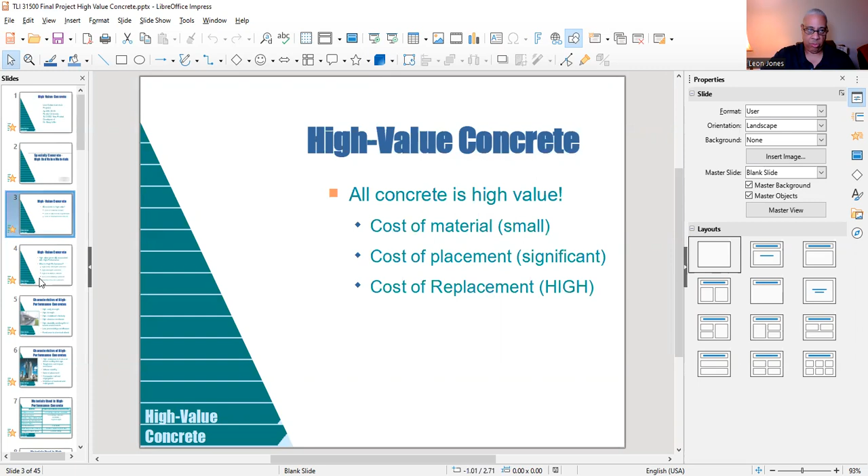That's for any project, so I wanted to develop a product that is cost effective but strong. Now, high value concrete is generally associated with high performance. What is high performance? Well, you have high early strength concrete, high strength concrete, high durability concrete,

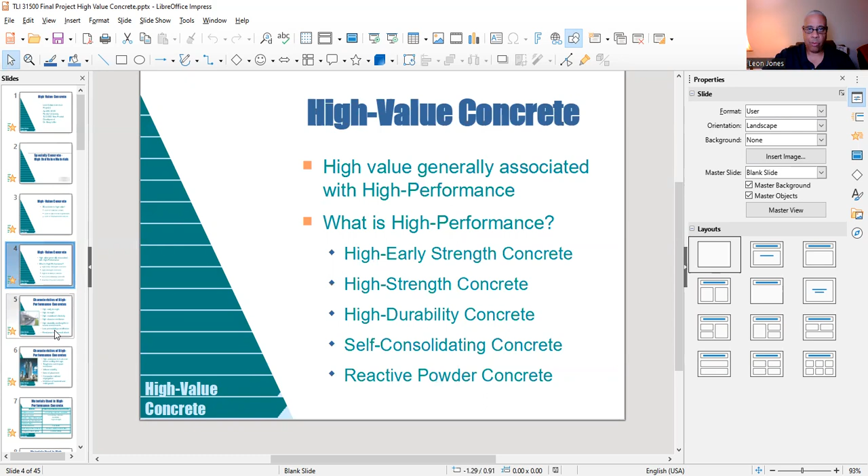self-consolidating concrete, reactive powder concrete - it's all brand new forms of high value concrete. Now, the characteristics of high performance concrete: again, we're looking for the high early strength, the high strength, the high modulus of elasticity, high abrasion resistance, the high durability and long life in severe environments.

As you know, concrete makes a good base. It can last a good 50 years. Now we're also looking for low permeability and diffusion, and of course, resistance to chemical attack.

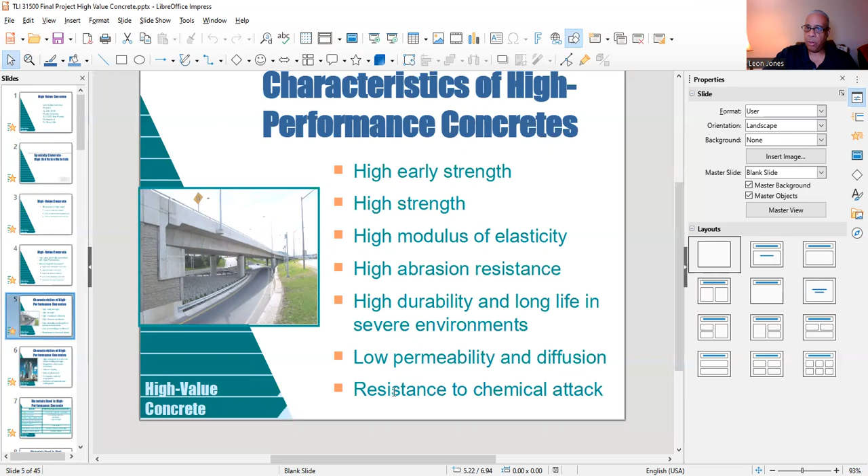Also, we're looking for high resistance to frost and deicer scaling damage, toughness and impact resistance, volume stability. Of course, you want the ease of placement, the compaction without segregation. When something segregates, you mix it up - you don't want segregation. And also the inhibition of bacteria and mold growth.

Now we're going to get into a little chart right here, talking about the materials used in high performance concrete. First of all, the material, Portland cement. We have blended cement, fly ash.

We also have calcined clay and metakaolin, calcined shale, superplasticizers, high range water reducers, hydration control admixture. And for our primary contribution and desired property, we're going to use the cementing material for durability,

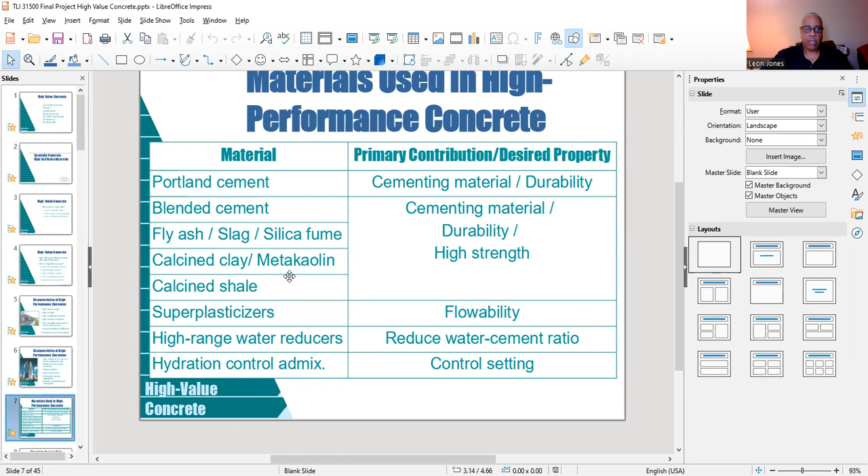high strength. What we're going to do is have some flowability - it means how it comes off the chute. Now all this is going to be tested in the lab, so we will get the testing results to see if we have to go back and make any changes in the design. We're going to reduce the water cement ratio, and we're going to have a control setting.

Again, the materials used in high value concrete are accelerators, and you need accelerator in the wintertime, especially when you're pouring concrete, because you want to set it quickly. And remember, concrete cracks in the wintertime and expands in the summertime, so you want to have control joints in your concrete.

You have your retarders, your corrosion inhibitors, water reducers, shrinkage reducers, ASR inhibitors. You also have optimally graded aggregate. Aggregate is stone - that's what the AGGR period stands for. It's aggregate. Polymer, they put on bridges.

And then what are we looking for? Control setting - we want to also accelerate setting, that's what accelerators are. When we deal with corrosion inhibitors, we want to control steel corrosion, because when you place concrete, you have what we call reinforcement bars, known as rebar, that add a little tension and strength to the concrete. And you want to reduce cement and water content and shrinkage, and control the alkali silica activity, always wanting to improve workability and, of course, durability.

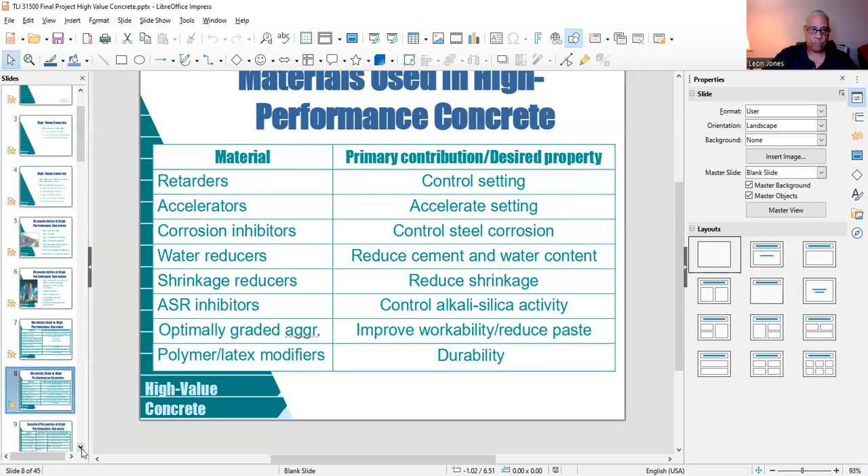Now, some facts that you have to understand. When I deal with any type of product, what kind of numbers do we need? Well, for high strength, we have what we call ASTM, that's the test method. ASTM stands for American Society for Testing and Materials.

Here's the criteria: 70 to 140 megapascals. When we deal with pascals, we're dealing with pressure, 28 to 91 days. That's for high strength. Now, high early strength, this is our spec right here.

ASTM C39, 20 to 30 megapascals, 3 to 12 hours or 1 to 3 days. That's the criteria.

Then we deal with high early flexural strength under a different specification, ASTM C78, 2 to 4 megapascals, 3 to 12 hours or 1 to 3 days.

Abrasion resistance, another specification, 0 to 1 millimeters depth of wear. This is what you use to test all of your specimens. You can't do anything without a spec.

Chloride penetration, that's AASHTO. AASHTO is the American Association of State Highway and Transportation Officials. They deal with your state roads. That's a spec, less than

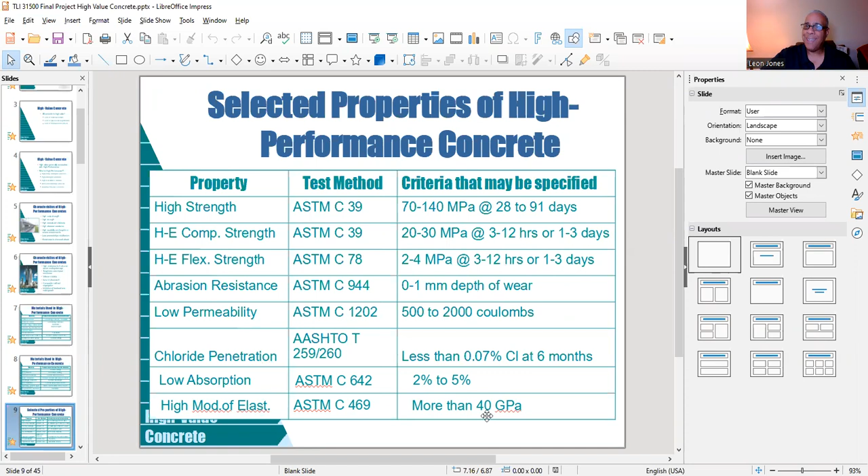Okay, again, when we deal with high early strength concrete, and this is all under high value concrete,

we also have, again, ASTM C39, AASHTO T22, 20 to 28 megapascals, which is when we convert it over, because when we deal with pascals, that's metric.

What we're dealing with is pounds per square inch here in America. Basically, when we lay concrete down for any type of infrastructure, we want 3,000 to 4,000 PSI, 3 to 12 hours or 1 to 3 days.

And again, for your high early flexural strength, when you have specifications as well, you're going to have two: ASTM and AASHTO. We're looking at 300 to 600 PSI at 3 to 12 hours or 1 to 3 days.

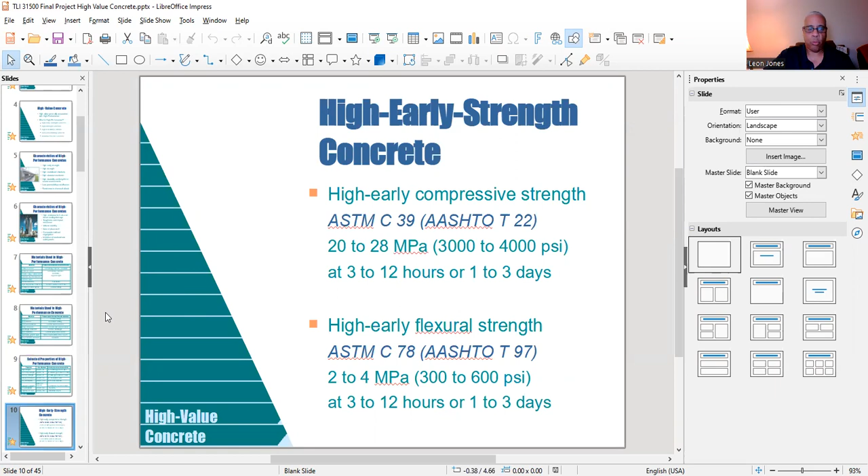Also, more data for you: high early strength concrete may be achieved by type 3 or high early strength cement.

When we deal with the content, we're dealing with, if you're in metric, 400 to 600 kilograms per cubic meter.

When you're dealing with English units, like we utilize here in the United States, 675 to 1,000 pounds per cubic yard.

Low water to cementing, and that's our materials ratio by mass, 0.20 to 0.45 mass, and a higher freshly mixed concrete

temperature and a higher curing temperature. This is what you want to do to achieve the workability of your concrete.

And again, this is basically a brand new product. So there's a lot of risk you take, but if you get it right and sell this product,

it can give your company a good reputation, and companies can generally make good profit and gain customers.

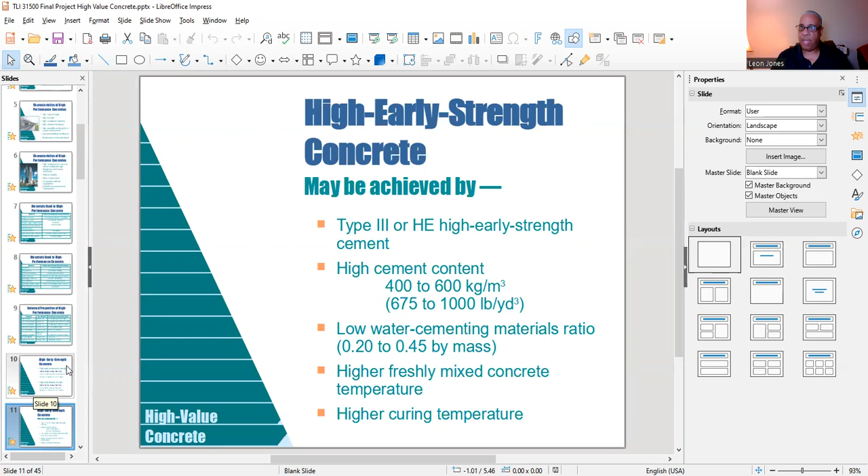In the second half of this video, I want to give you the business aspects of this product, how we can sell it.

Alright, high early strength concrete can be achieved by chemical admixtures, silica fumes, steam or autoclave curing, insulation to retain heat of hydration, and special rapid hardening cements.

Now, what I'm giving you right now is, just think of it as we're in a lab and we're developing this product, and we're running different tests on this product just to see what our data is going to come to be.

And more data for you: we're in our high strength category, and most of us, when we get to the comparison, most structures use ready mixed concrete.

And generally on that kind of concrete, you're going to go from 3,000 to 6,000 PSI.

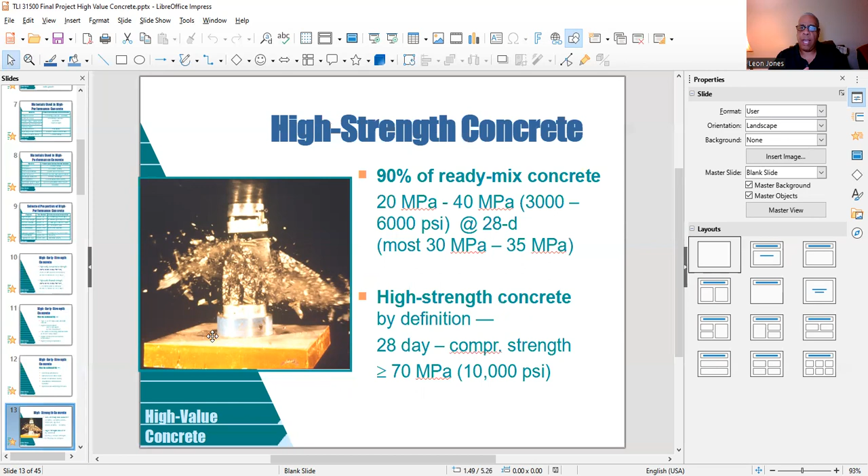And when we deal with high strength concrete, by definition, that's 10,000 PSI. That is really high, that's 3 times higher than the 3,000 to 4,000 PSI that we want.

We're going to get into the aggregates. This is what is put inside your concrete. We want 3/8 to 1/2 inch nominal maximum size, because that will give you the optimum strength. And what we want to do is combine single sizes for required grading, which allows for closer control and reduced variability in concrete.

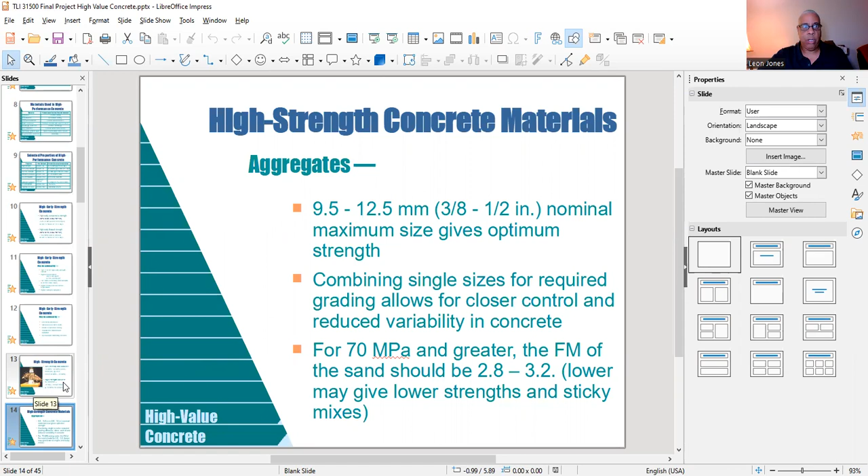Anything for 70 megapascals and greater, the sand should be right around 2.8 to 3.2. Now if it's any lower than that, your mix is going to be sticky, and it's going to be a bad mix. And we'll have to go right back to the drawing board, find out where we had the issues, and start all over again.

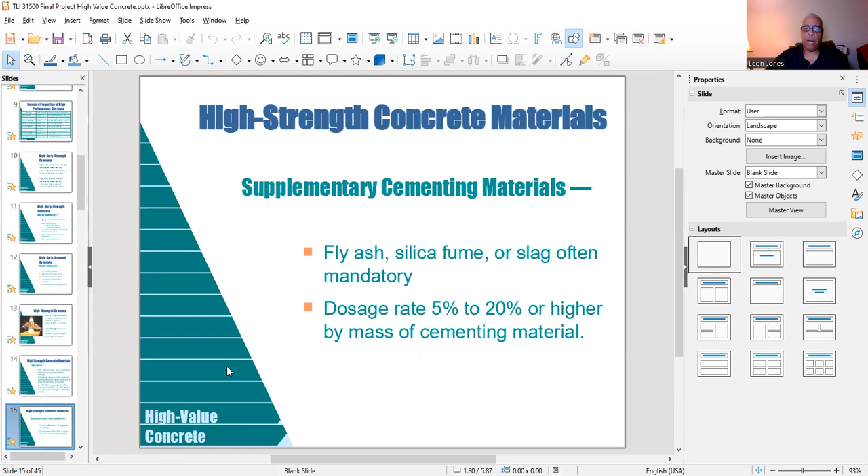We also have supplementary cementing materials: fly ash, silica fume, slag. Dosage rate is basically 5% to 20% or higher by mass of cementing material.

Admixtures - your retarders, your plasticizers, your water reducers - are mandatory in high strength or high value concrete. Now, when you're dealing with air entraining admixtures, they are not necessary or desirable in high strength concrete. However, when we run the test, air is mandatory where durability in a freeze-thaw environment is required, and that's basically used in structures.

In recent studies, we have the air required: at a water cement ratio of 0.30, air is required, and under 0.25, no air is required. That's the data.

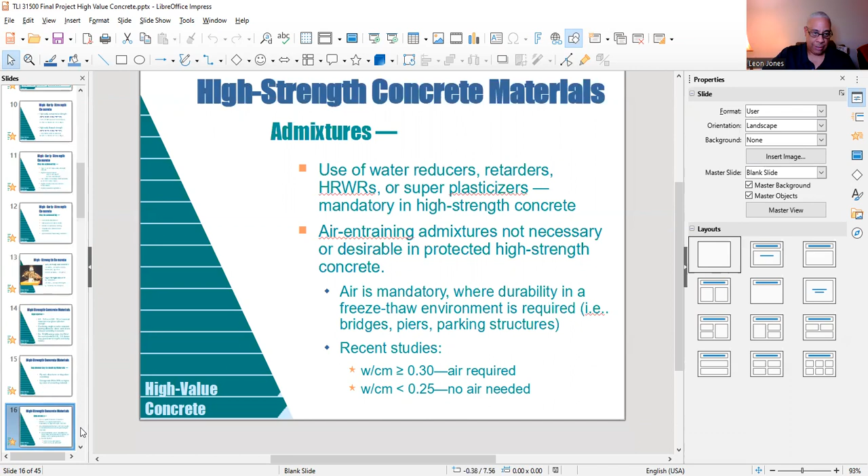Okay, we also worry about placing, consolidation, and curing. Why? Because delays in delivery and placing must be eliminated. Consolidation is very important to achieve strength.

Now, when we slump it, we basically have a slump cone. What we do is put concrete in that slump cone, rod it 25 times, 3 layers apiece, and then lift the cone about 45 seconds from the concrete. You'll see that if the concrete holds the shape of the cone, it's very stiff. If it's watery, the concrete is liquidy. Now you want 7 to 9 inches, which means the concrete is going to be on the liquid side.

Also, you want little if any bleeding; fog or evaporation retarders have to be applied immediately after strike off. Again, when testing, before you lift the cone off the concrete, you have to strike it off using what we call the steel rod.

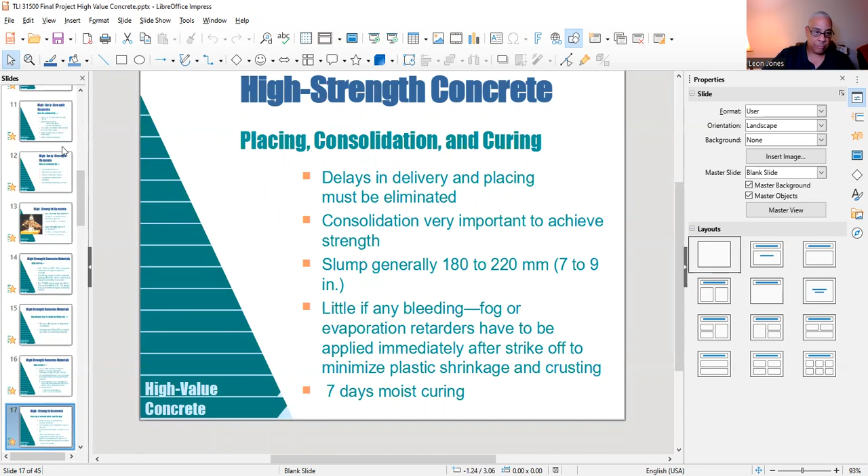High durability concrete - well, we focused on that in the 70s and 80s. Today, we're generally dealing with high durability.

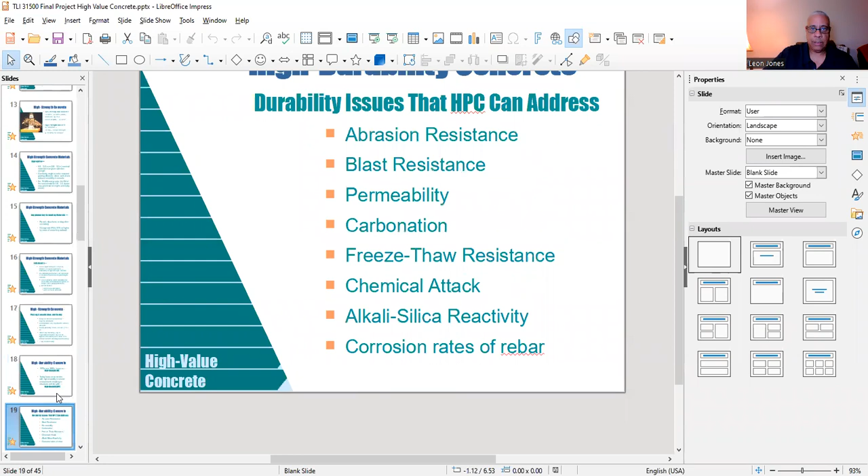Now, when we deal with high performance concrete or high value concrete, from my research these are the issues that I normally would come up with: blast resistance, permeability, freeze-thaw, alkali silica reactivity, corrosion rates of rebar - meaning your reinforcement bars are corroded - and then abrasion resistance.

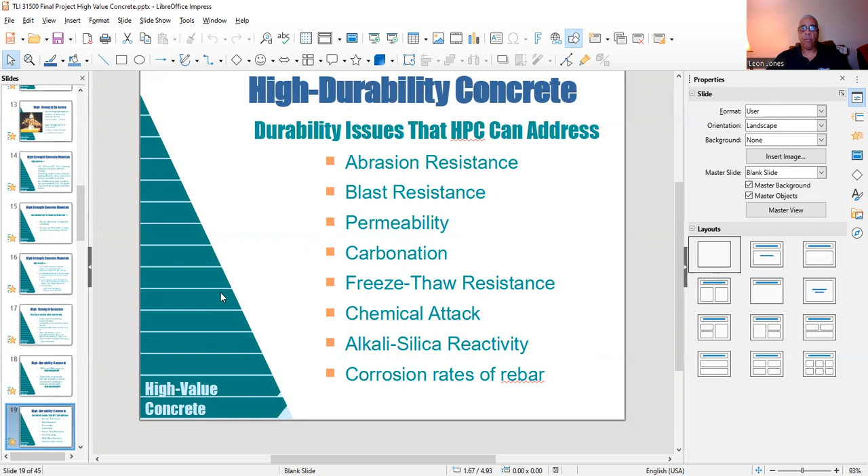All right, high durability concrete. This is actually a product - the Confederation Bridge in Northumberland Strait, which is in Prince Edward Island, New Brunswick. Here's the data: in that mix, the cement is 671 pounds per cubic yard, fly ash 76 pounds per cubic yard, silica fume 72 pounds per cubic yard, with a water cement ratio of 0.30. Then you also have water reduction, 47 ounces per cubic yard, and HRWR, which is 83 ounces per cubic yard. Your air is 5 to 8%, and generally your strength is 8,700 PSI, which is really strong.

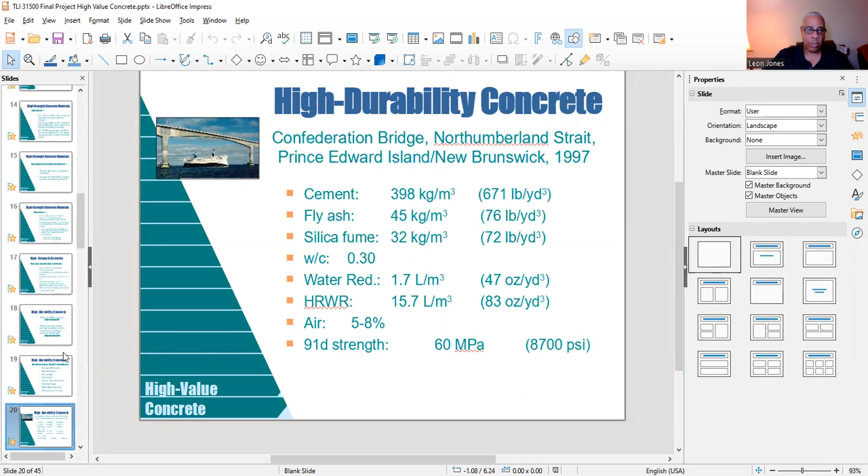And under high value concrete, self-consolidating concrete, or self-compacting concrete - why, because it basically consolidates on its own. This was concrete developed in the 1980s in Japan. This type of concrete increased the amount of fine material like fly ash or limestone, and it had plasticizers in it as well.

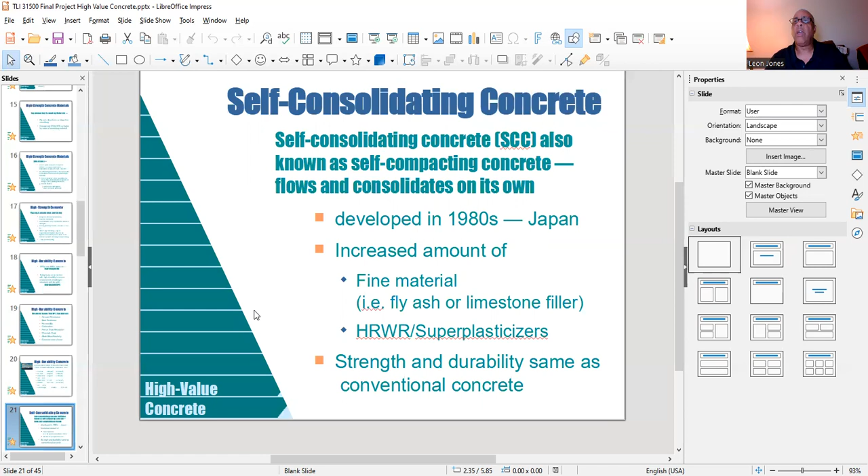Now, basically this type of concrete has the same durability - and when I mean durability, it doesn't take a lot of load, like if you're on a road, trucks have a heavy load. Buildings have loads, live loads, strength - same as conventional. Conventional concrete is ready-mix concrete.

Self-consolidating concrete, and here's the graph. This is what we also use in soil mechanics as well. This is 10% cement.

18% water. Then you have your air, 2% to 8%, 2%. Then you have your fine aggregate. When something is very fine, like soil, it's like powder. And when you compact it, there's no air. And something is coarse, which is what regular mixes have. Coarse, you have voids. Stone is very coarse. Number 8 stone, number 57 stone, very coarse.

But these are the aggregates plus sand. Sand is a fine. This is what makes up the mix. And from my graph, this is the percentage of material that goes into making this regular mix. This is the regular mix at the top, and at the bottom, this is your self-consolidating concrete.

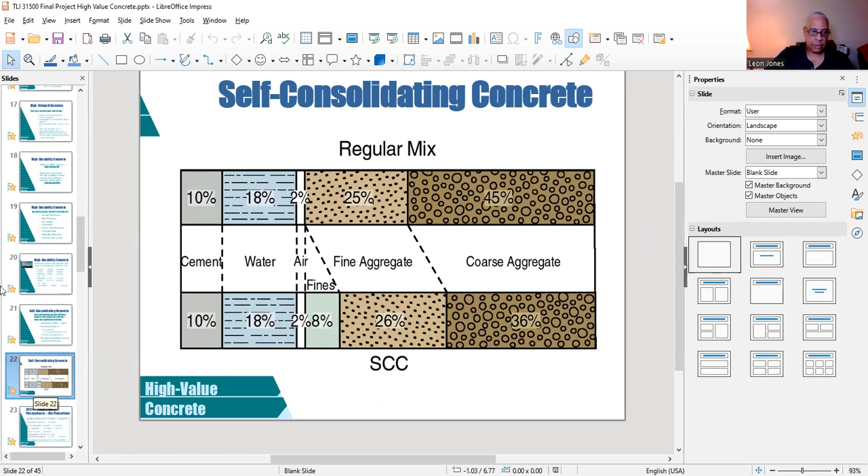All right, self-consolidating concrete for a power plant in Pennsylvania, mixed proportions. This is good data right here. And if you're going to design concrete in the lab, in order to sell it, you need to come up with some good numbers. Well, for Portland cement, type 1, 500 pounds per cubic yard.

For slag, 215 pounds per cubic yard. Here's your coarse aggregate, right around 1,140 pounds per cubic yard, and right around 1,730 pounds per cubic yard, that's your fine aggregate. And then you have your water. Let's put water in all concrete, 286 pounds per cubic yard.

And you have your plasticizer. Now, again, plasticizer type F is based off of this specification, ASTM C494. And for your polycarboxylate base, it's 35 ounces per cubic yard.

So your AE admixture as needed is 6% plus or minus 1.5% air content. And what do I mean by that? I'll tell you right now. So if I'm running an air content test, if I have 6%, I'm allowed to go 1.5% lower, which would be 4.5. And of course, 1.5% above 6 would be 7.5. So my specification would actually call for a variance or range between 4.5% and 7.5% for air content.

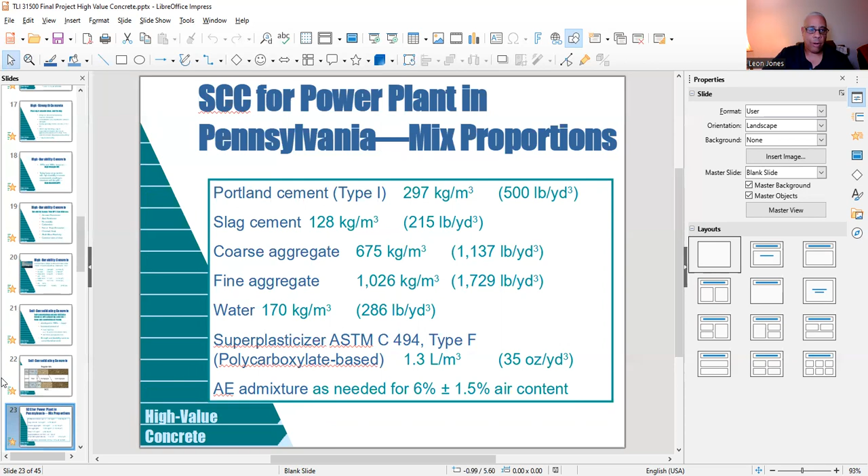Properties, RPC, high strength, 200 MPa, can produce to 800 MPa, very low porosity. Now, properties achieved by this type of concrete, you have a maximum particle size of basically under 300 micrometers. Optimized particle packing, low water content, steel fibers, heat treatment.

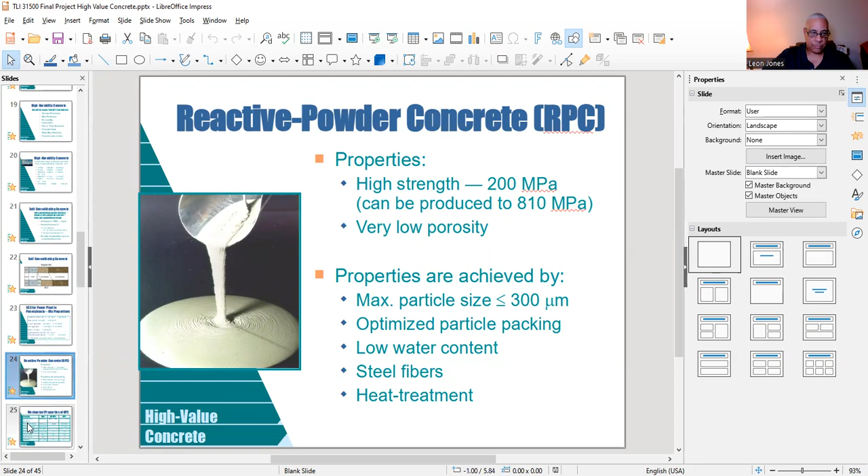This is what it looks like. Getting some more content, this is data. These are all the properties that are associated with RPC. Again, RPC is reactive powder concrete, compressive strength, that's a big one. We have flexural strength, tensile strength, modulus of elasticity, fracture toughness, freeze thaw, carbonation, and of course, abrasion.

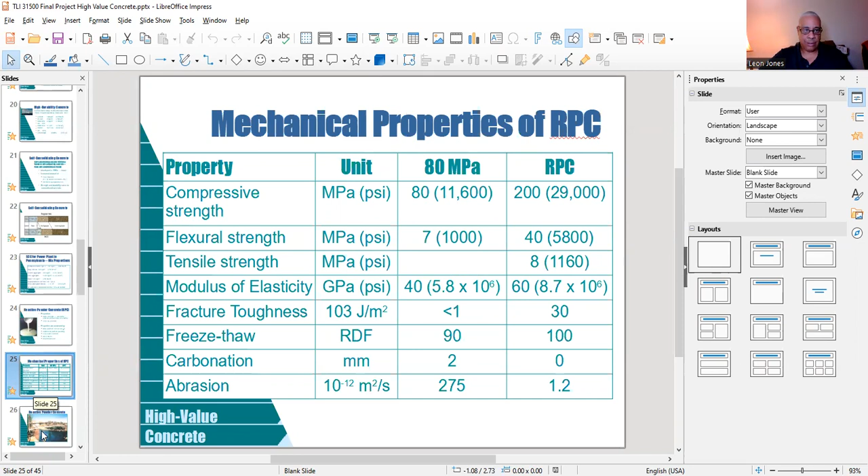In order to understand concrete, I can put numbers down, I can put charts down, but I have to have the right material in order to produce the concrete. And it has to go through a process. And then once it goes through a process, the prototype would be tested to see if it would be available for use by contractors, the public.

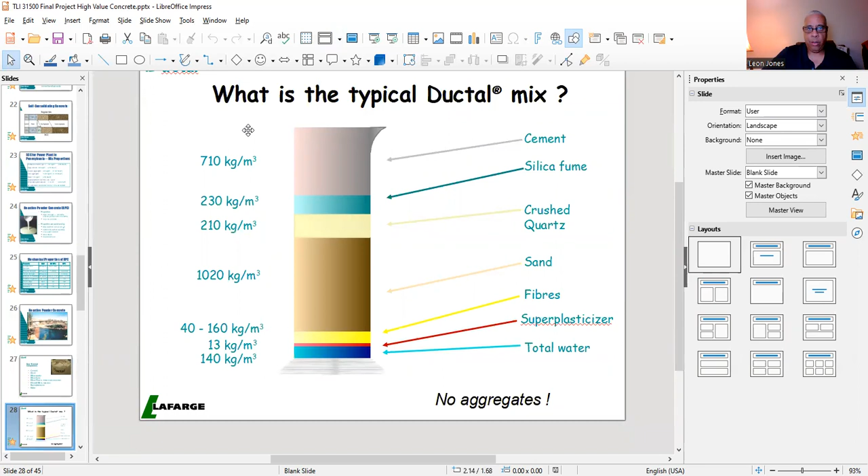All right, again, what's in a typical Ductal mix? This is your chart, it breaks it down: your cement, your silica fume, your crushed quartz, your sand, your fibers, your plasticizer, and your total water.

Now, again, this is all metric, and this is all your water cement ratio, 0.20. This is your graph of what percent is in this Ductal mix: cement, silica fume, crushed quartz, sand, fibers, plasticizer, and total water.

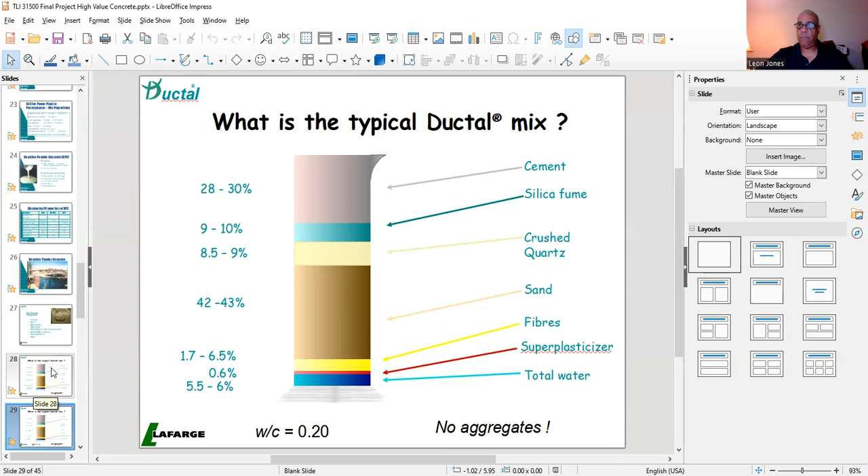Now, the first slides I did gave you some information about the product, data about the product, how it's produced, how I tested it. So in your head, think about it now - got a prototype.

Now we got to launch the product plan. And basically, what are we thinking? We're thinking about the durability, the resistance to extreme weather, how this concrete is going to hold up to heavy loads. What makes it work on just about any construction project?

Again, when it comes to selling concrete, you've got to narrow your market down to those who are likely to buy your products. Otherwise, mass marketing efforts meant to persuade builders to buy your concrete products could prove to be ineffective, and also you're risking your company's money.

Product concept: high value concrete. We're going to be comparing because we have high value concrete and we have ready mix concrete. High-performance concrete may be defined as concrete with strength and durability significantly beyond those obtained by normal means. The required properties for concrete to be classified as high performance therefore depend on the properties of normal concrete achievable at a particular time and location.

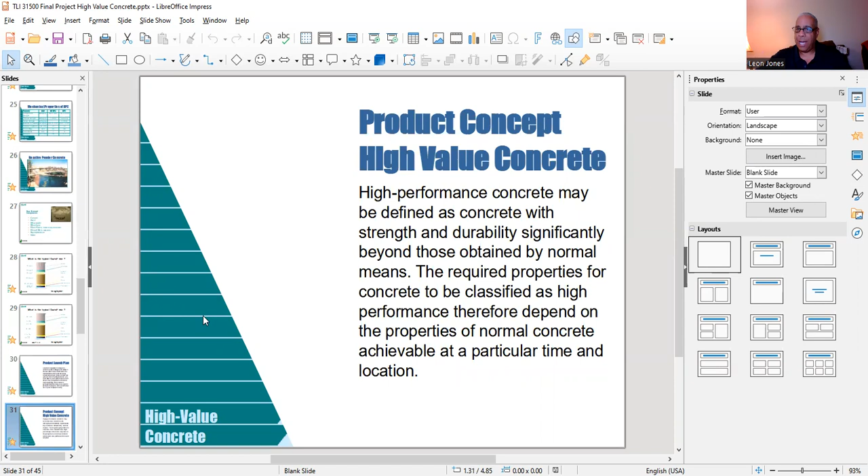Now, ready mix - this is the concept statement for ready mix. Before, you had the product statement for my product, high value concrete. Now getting into the concept statement for ready mix concrete. Ready mix concrete is preferred - a lot of builders use it now because you can mix it on site. The mixture has higher precision, and having concrete ready to pour reduces confusion on the work site. So ready mix concrete can be used for buildings, roadways, walls, and more.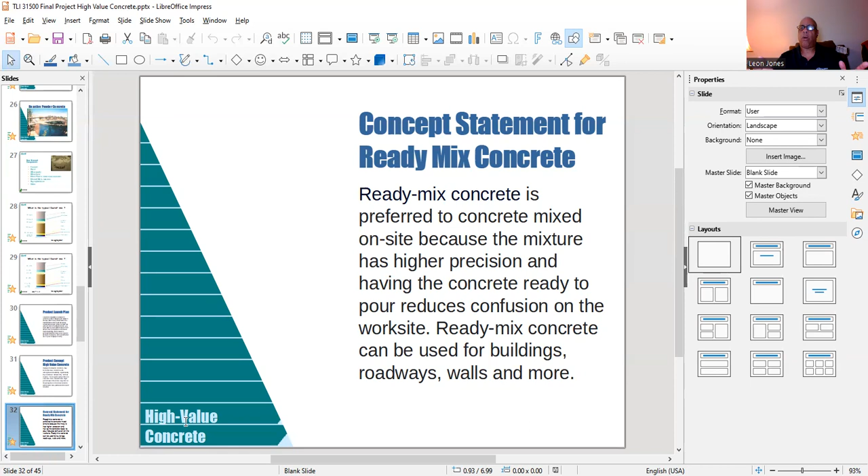Okay, a question there about high value concrete. If I was going to ask potential customers, here's what I'm going to ask: What is the curing time for high value concrete? How much weight can high value concrete support? Does high value concrete need any type of reinforcement? Can stains be removed from high value concrete? Can decorative finishes be applied to high value concrete?

And also, since a lot of contractors use ready mix concrete, what's the difference between high value concrete and ready mix concrete? How can you ensure high value concrete is of high quality? And dealing with green construction, is high value concrete a sustainable material? And what factors had an impact on high value concrete?

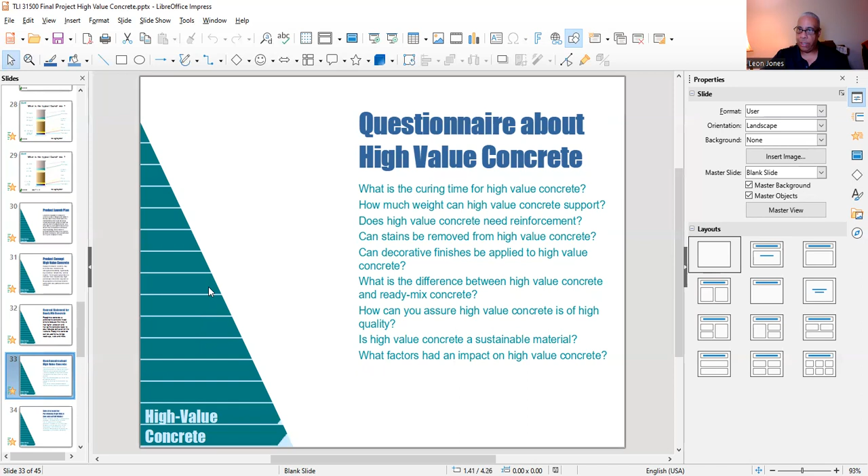Sales forecast. For purchasing high value concrete, using the ATAR model - ATAR stands for awareness, trial, availability, repeat, and buy. From my construction industry, I knew generally the market because it's made up of a lot of contractors and some individuals who are in the private sector.

They buy concrete - that's my target market, 10.5 million customers. So to break everything down, I took my awareness, my 10.5 million, and said awareness was right around 0.60, and I came up with 6.3 million. For my trial, 6.3 million times 0.20, you'll see how these numbers work out in a minute. So when I got my 6.3, I multiplied it by 0.20 and got 1.26 million.

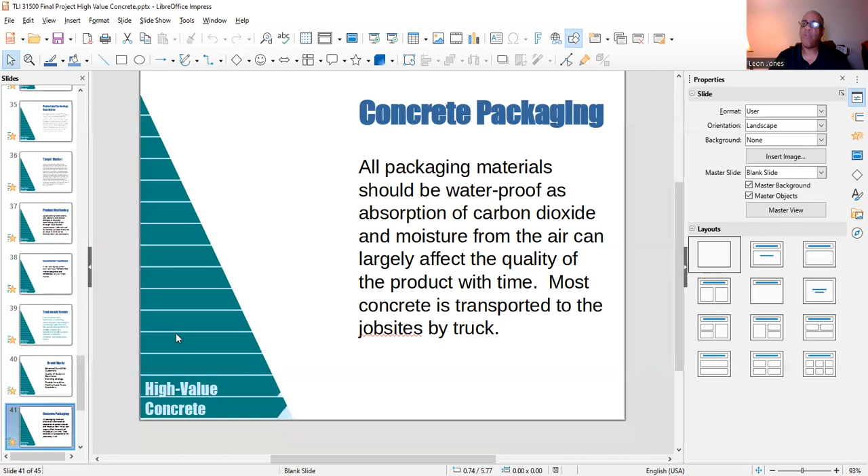Market testing. What I would do is test the market. I'd run a SWOT analysis: strengths, weaknesses, opportunities, and threats. Generally, market opportunities are always expected to open up a growth window for new entrants in the market. This helps understand unmet needs or untapped potential in the market. So offering a small sample is the best way to test a new market.

When it comes to a timeline for launching new construction materials, particularly a concrete material, it would generally take 1 to 2 years, because of the design and testing process and the availability of materials. And that concludes this presentation.

Well, before I conclude, I have what I call my high value protocol. Basically, I select the appropriate slump value, provide the max aggregate size and shape, and select the cement type, because high value concrete has different types of concrete mixes involved with it.

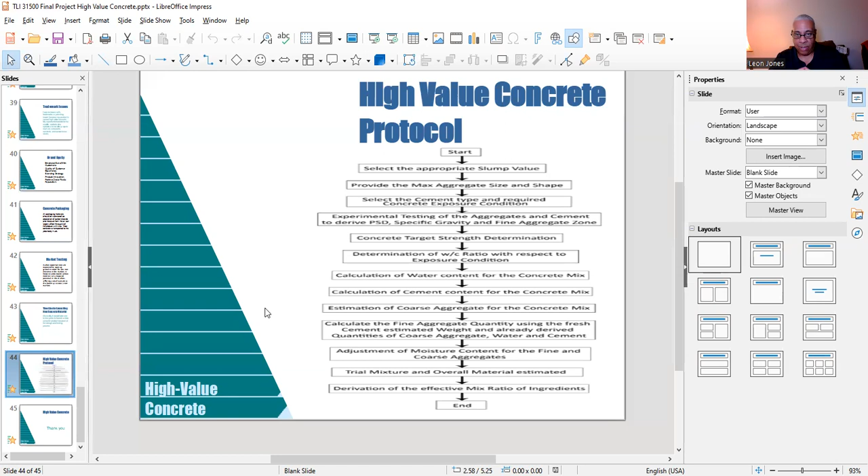Then run a trial mixture overall from the estimated material. Then I'm going to have a derivation of the effective mix ratio of ingredients. That is my high value concrete protocol.